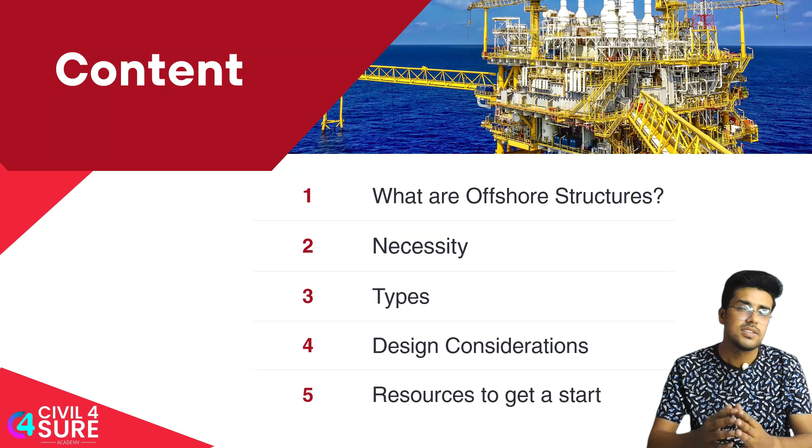First of all, we'll start with the basics of what are offshore structures. See, these are the installations, or you can say these are the kind of structures or facilities which are made in the marine environment far away from the coastal area into the deep sea waters, and they are usually made to produce and to transmit electricity, or for oil, for gas and other natural resources.

These structures are usually far away from the coastal areas. They are in deep areas. They can be in shallow areas also, but it totally depends on the reserves, where are the oil reserves. When we talk about oil reserves, or crude oil reserves, we usually talk about UAE, or we talk about the USA. It means they have very high crude oil reserves trapped in between the rocks somewhere down the crust.

Okay, so we need something, we need to drill it. It can be on the ground, it can be far away in the seabed also. So in case of sea, or the ocean, we usually need a stable structure which is going to be placed firmly at some specific location in the sea, and then we are going to drill there and transport the oil after processing and all. So oil platforms are the best example of offshore structures.

See, offshore structure in broad terms doesn't always signify oil rigging. It can be about marine study also. If you want to study some specific species, then we need some kind of platform far away in the ocean where we can study all this. It's not always necessary that offshore structure means oil rigging, it can be for research purposes also and so on.

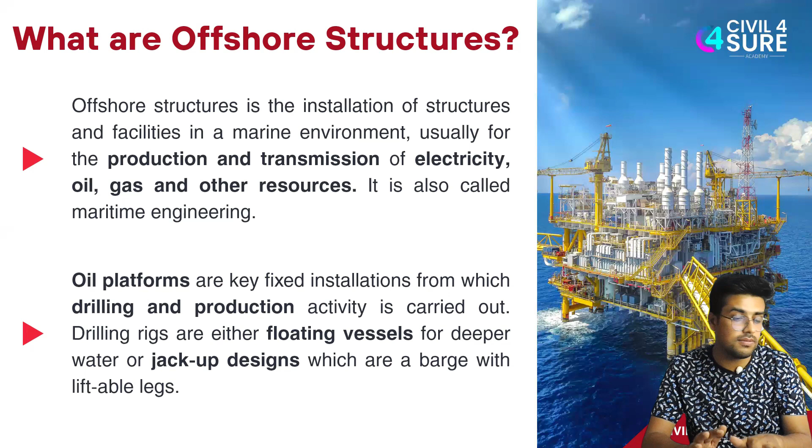Now the question arises, what is the necessity? Is it necessary enough? Yes, the necessity lies in the demand of oil, that is crude oil we are going to talk about here. Crude oil, as you all know, is very essential for our day-to-day life. We use it in transportation fuel.

Our cars, bikes, buses, even jet fuel—the fuel used in aeroplanes comes from crude oil. We separate things from crude oil like diesel and petrol. These all get separated at different temperatures by the fractional distillation process. So transportation fuels come from it, as well as heating oils that we use to heat up our rooms.

Oil is also used for electricity generation. Some electric generation plants use oil to heat up water, and then the steam process follows. So electricity generation, manufacturing processes, and even medicine, pharmaceuticals, and personal care products all use oil. So oil has a major demand and it's going to stay that way.

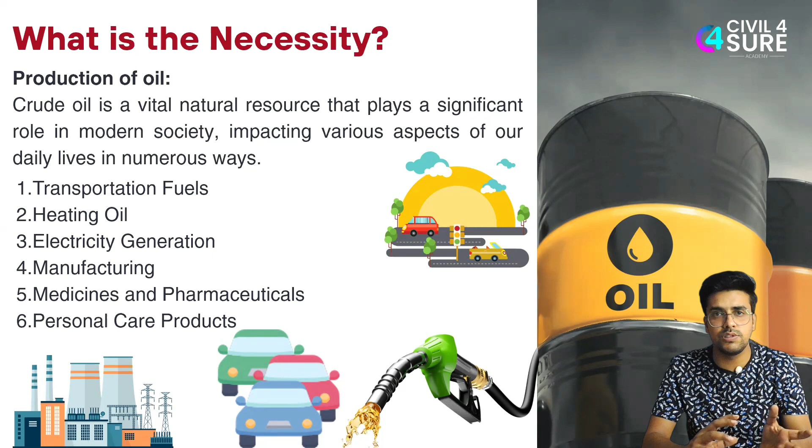Because of oil, we need to make offshore platforms—this is a necessity. Now we know the basic meaning of offshore platforms. When I use the word 'platform', that means we're talking about the rigging process, signifying the oil rigging process. So offshore platforms mean structures made far away offshore in deep waters. These can be RCC and steel structures, made to produce oil from that particular position. And we also know the necessity—oil is in huge demand, so we need to do it.

Now let's go a step further and look at some technicalities of the offshore platform. Offshore platforms have different parts, as you can see here. The first one is the substructure—the part below sea level. It can be a fixed platform or a floating platform, and it provides support and stability.

The second part is the deck—on top and to the side, where all the facilities, machinery, and equipment are located. Drilling equipment is the central piece, used to extract oil and gas from beneath the seabed. There are also production facilities and a reservoir, along with other facilities that produce the crude oil.

There are also risers and pipelines. What happens is the crude oil is trapped between rock surfaces under very high pressure. When we punch between these rocks, the oil flows automatically upward if there's enough pressure. But if there isn't enough pressure to flow up, we use specific kinds of pumps and machines to bring it up. So these risers and pipelines are part of our platform.

Mooring and anchoring systems are used to anchor our structure to the seabed. Platforms can be of different types—fixed and floating, as we'll see in the next slide. In the case of floating platforms, they need to be fixed by anchors, using tethers or tendons that fix the platform to the seabed.

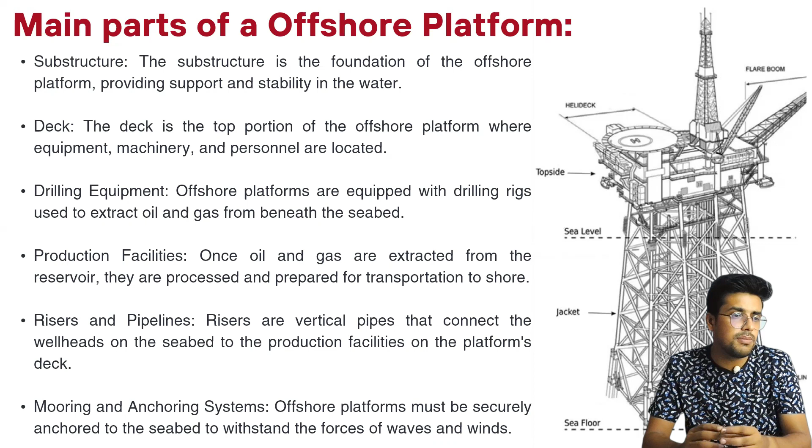So these are the basic main parts. You can also see the diagram—there's a flare boom on top, a communication tower on top, and we also have a helideck for faster communication, along with other components.

Let's move one step forward and see the types of offshore platforms. The first type is known as the fixed platform, and the second type is known as the floating platform. In fixed platforms, we have three types: jackets, gravity-based structures, and compliant towers. In floating platforms, we have floating production, storage, and offloading, that is FPSO.

Floating production systems are there, tension leg platforms are there, spar platforms are there, and semi-submersible platforms are there.

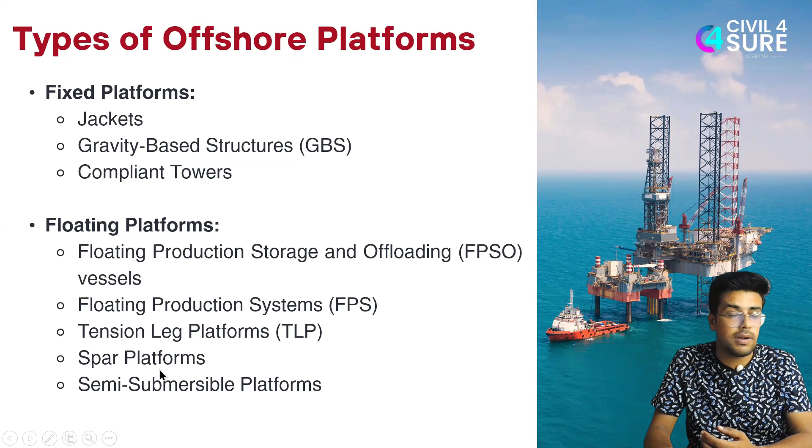The first we'll talk about is fixed platforms. As the name suggests, fixed platforms are permanently attached to the seabed, and they provide a stable base for oil and gas exploration. They are fixed, connected to the base.

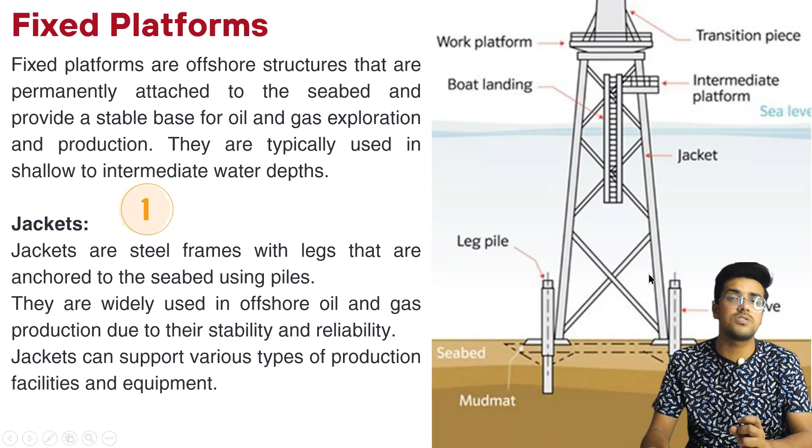The first type is the jacket type. Jacket platforms have steel frames with legs that are anchored to the seabed using pile structures. You can see on the right side of the diagram the pile structures at the bottom, with a steel frame and leg type structure attached to them. So it is a totally fixed structure, providing very good stability and reliability. It's simple to understand. One thing to note is that this type of structure is used in shallow areas, not deep areas.

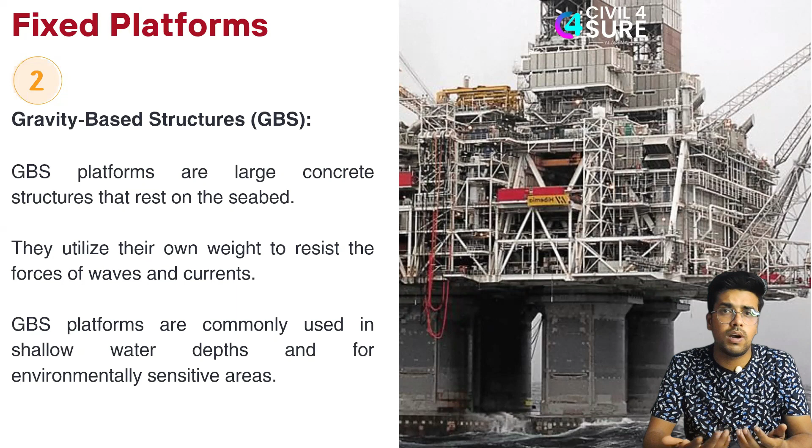Second is the gravity-based structure, GBS. GBS platforms are large concrete structures that rest on the seabed. On the right side of the diagram you can see huge concrete columns, and because of their own weight, they resist the forces of waves and current. Onto these structures, we have our steel platforms. These are commonly used in shallow water depths. Again, we can't use it for deep waters, because at that point we would need more concrete, and more research and study about the concrete remaining in that water for so long. We need to study that kind of thing also.

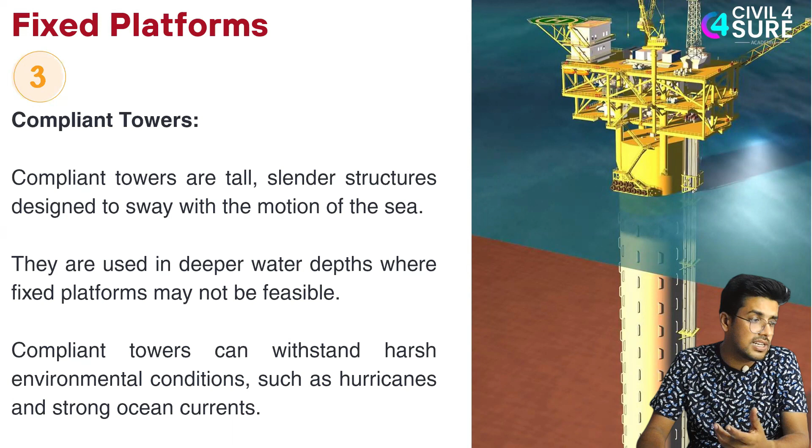Third is the compliant tower. These are tall and slender columns, designed to sway with the motion of the sea. They provide some flexibility. The compliant structure has both stiffness and flexibility, giving us the profit of both things. So compliant towers are tall and slender portions that can be used to withstand harsh environmental conditions such as hurricanes and strong ocean currents. Now we know what fixed platforms are.

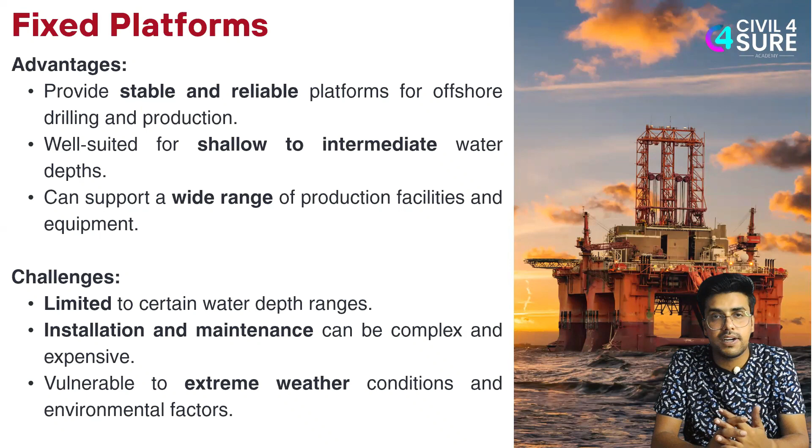Now let's talk about their advantages and challenges. First, the advantages: they are stable and reliable, as we all know. These are well suited for shallow to intermediate water depths, and they can support a wide range of production facilities. Now, what are the challenges? First, they are limited to certain depths of water - we can only use them for shallow depths, we can't go for deeper portions of the sea. Also, installation and maintenance can be complex, and they are vulnerable to extreme weather conditions and environmental factors. So these are the advantages and challenges we have.

Now let's jump onto the floating platforms, our second type of platforms. Floating platforms are not permanently attached to the seabed - as the name suggests, they are floating. If they are floating, how do we fix them at a particular place? We use anchors or dynamic positioning systems to maintain their position. Because of that, we can use this type of platform in varying water depths - shallow and deep both.

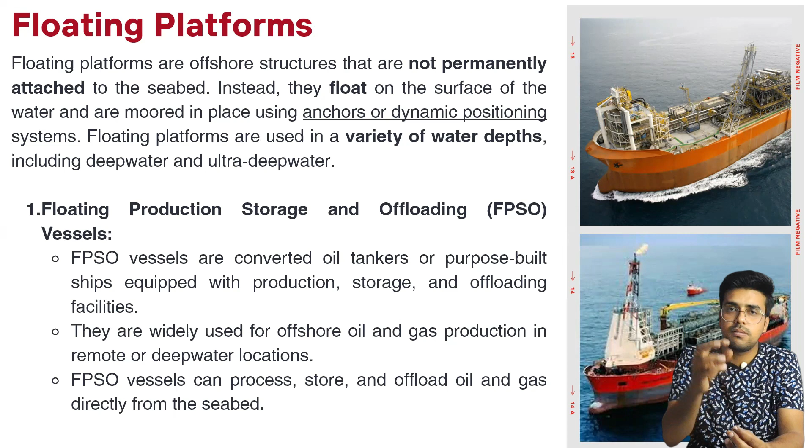The first type we'll talk about is the floating production, storage and offloading vessels, FPSO vessels. On the right side, you can easily see these are kind of oil tankers, or purpose-built ships used for production, storage and offloading. These are majorly used for oil and gas production. The second one is the floating production system, which is similar to the previous one.

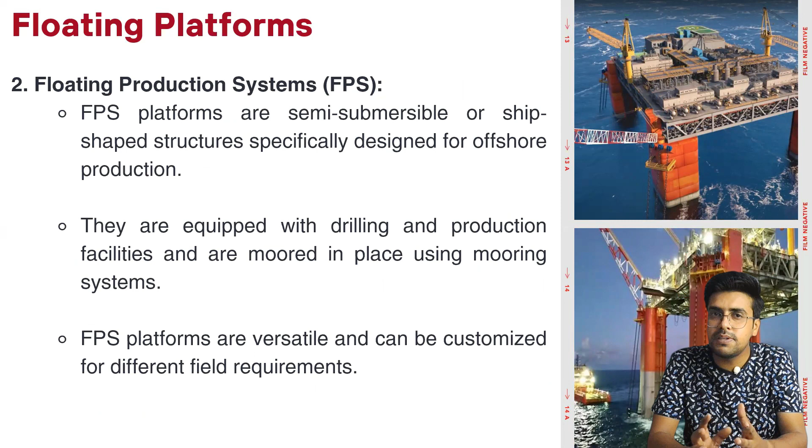This can be semi-submersible, or you can say the ship-shaped structure. They're going to be almost same as in the previous one.

These tethers restrict the vertical movement and also restrict the horizontal movement to some extent. So they provide flexibility and also stiffness, which is a very good thing about TLPs. They provide stability by applying tension to the tendons and allowing the platform to float while minimizing vertical movement, so they can be used in deep water. They have a huge advantage of being used in deep waters.

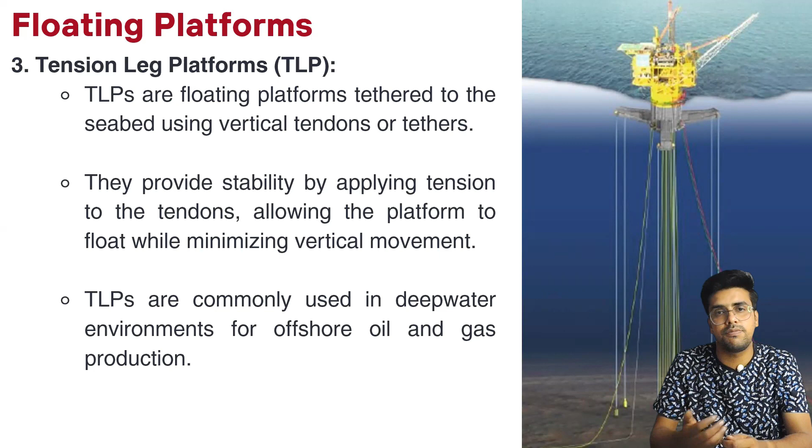The fourth one is the spar platform. Spar platforms are deep draft floating structures that consist of a cylindrical hull and a moored vertical column. On the right hand diagram, you can see it has a cylindrical hull, and it has a moored vertical column, moored by tethers or tendons to the seabed. This has a heavy weight at the bottom to stabilize its vertical movement. These are designed to float vertically and are stabilized by a heavy counterweight at the bottom.

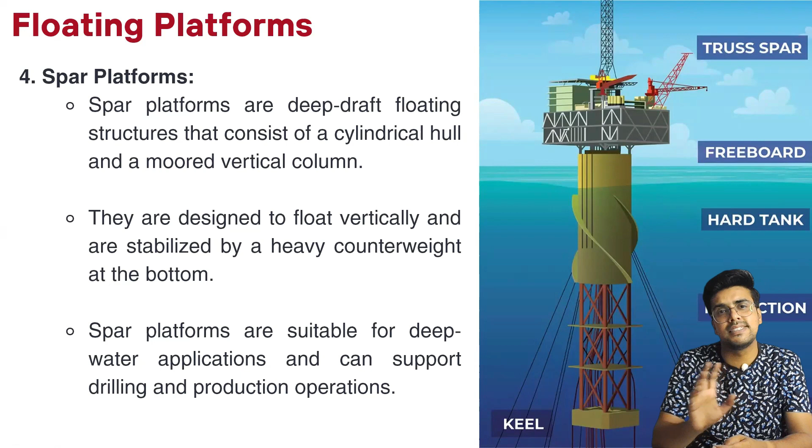So spar platforms are again used for deep water applications. These, spar platforms and TLPs, are used for deep sea water. Now let's talk about their advantages and challenges.

First, the advantage is that they are suitable for deep water and ultra deep water. They provide flexibility and mobility. In case of high current or high wave, they provide flexibility. They can be quickly deployed and relocated as needed, since they are not fixed.

Now what are the challenges? Higher initial investment is needed. Maintenance and logistics are very complex, and they are vulnerable to harsh weather conditions and ocean currents. If the weather is very harsh, it becomes somewhat difficult. More research is needed for the manufacturing of this particular thing.

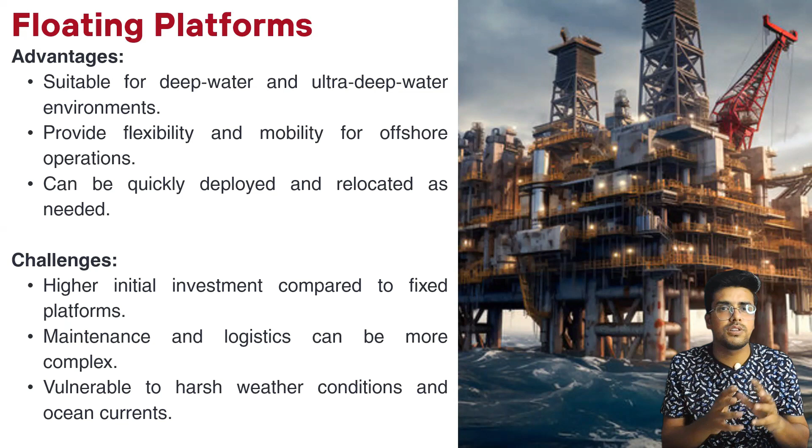So now we have a basic idea of what offshore structures are, their necessity, and their types, fixed and floating. We have also gone through TLPs and spar platforms. Now let's talk about the design considerations.

What are the considerations we need to make in order to decide what kind of offshore platform to use at a particular position? First, we need to check the water depth. If the water depth is more, we go for TLPs or spar platforms. If the water depth is less, we go for GBS or jacket structures.

Environmental loads are also there. We need to check currents, winds, and past performance of that particular place. In case of these environmental loads, we need to check it out.

Soil conditions need to be seen, because we are going into the seabed. We need the soil conditions, what kind of bearing capacity is there, stability influencing the foundation, and what kind of composition the soil has - we need to check that.

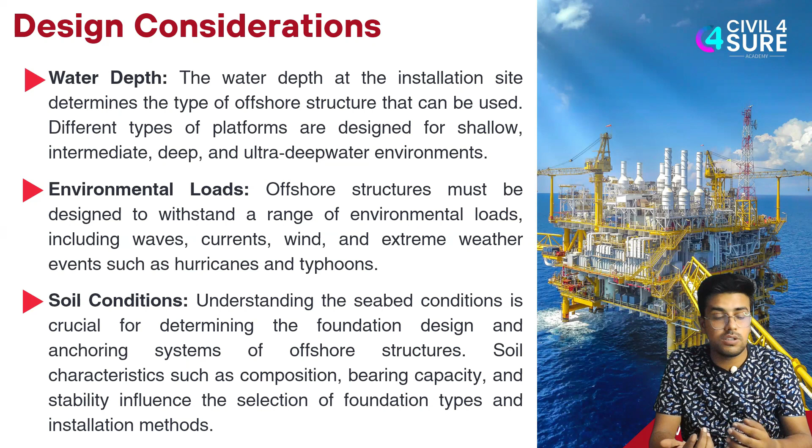The next consideration is structural integrity - the structure itself. Material selection and corrosion protection measures must be in place, because our structure will be in the water for years, exposed to salt spray and chemicals. So we need to check what kind of material we are choosing, and that material must provide structural integrity.

The next one is very important: safety and risk management needs to be there, because we are far away from the coastal area.

We can't have emergency medical help there directly, but there is provision of a helipad so a helicopter can come and provide assistance. Still, we need safety and risk management. If there's a fire, explosion, oil spill, or personnel hazard, we must have a plan and infrastructure to cope with that emergency. Safety systems and redundant equipment must be there.

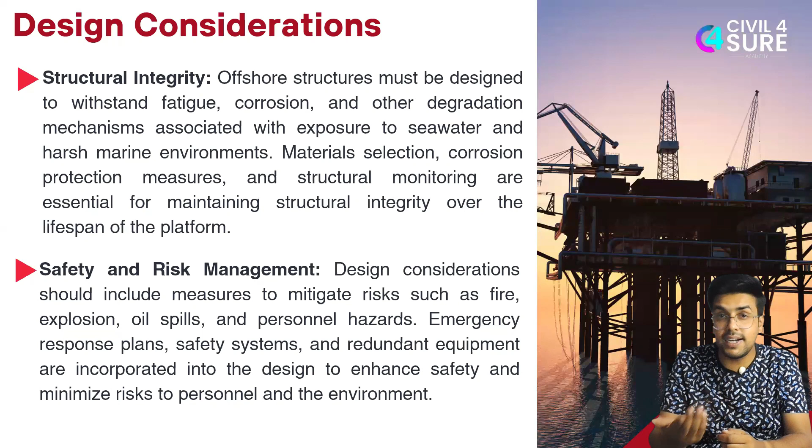Operational requirements we need to consider while designing include how the space will be utilized, whether it's multi-story or single story layout. Regulatory compliance is needed, and code checks must be done prior to designing. Environmental impacts must be checked.

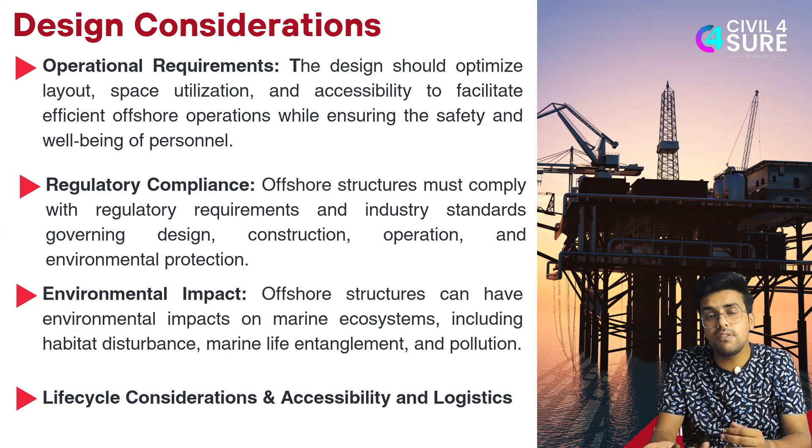As we know, we are drilling somewhere in the ocean and blasting there, creating major vibrations. So it's obvious that aquatic life is going to get disturbed. We must check that environmental impact is reduced or avoided. Life cycle consideration, accessibility, and logistics must also be addressed. These are the design considerations that an engineer or planner must account for prior to designing and deploying this type of structure.

Now let's talk about load considerations - what kind of loads we need to consider. Environmental loads must be considered, and by applying classical wave theory we can predict the loads, using frequency, amplitude, and sine theta wave formulas. Wind load and earthquake load, which have dynamic effects, also need to be used.

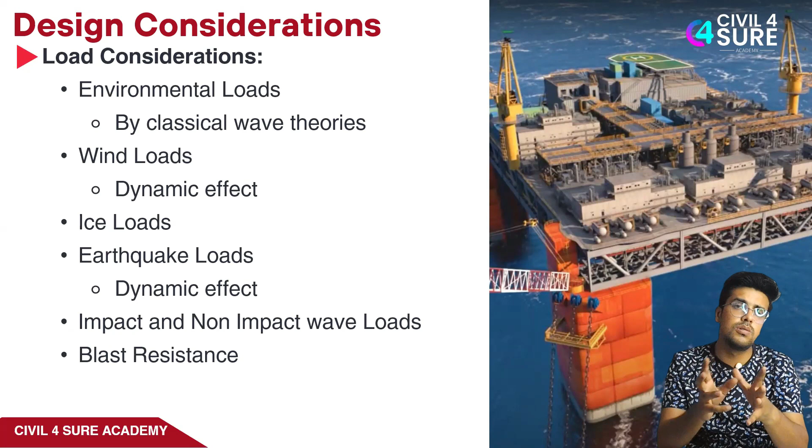Ice loads, and any impact or non-impact loads by waves, must be considered. Blast resistance must be there, and fire resistance must also be there - it is a must, since fire is going to be there. These are the loads that an engineer generally considers at the time of construction.